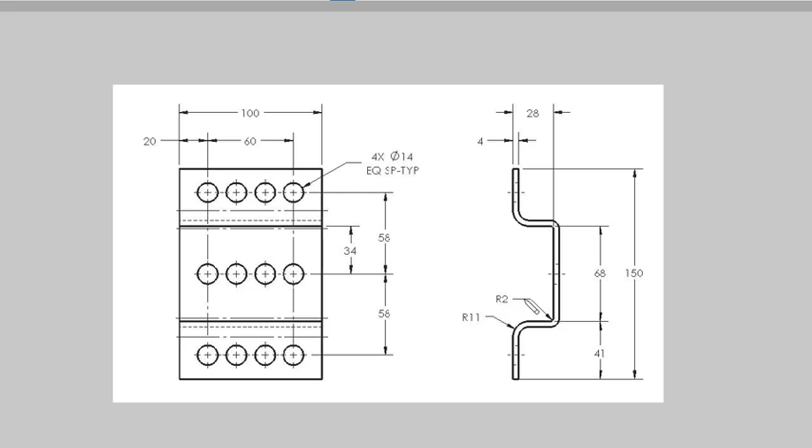But if you try to draw all the details of the profile, it's going to be too tedious. So instead, I want to use an open profile method. And also this part is symmetric, so I'll just draw half of it and mirror it. Make sure the unit is millimeters. I'm going to use the right plane to make a sketch.

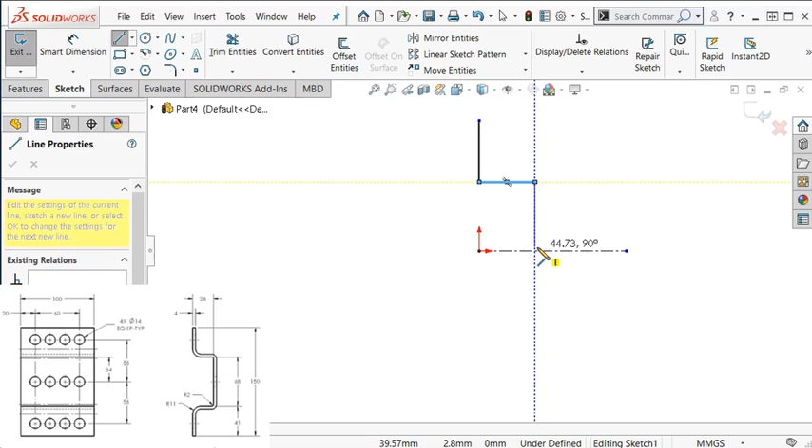I'm going to use a center line because I'm going to draw only half of it, the upper part. And I'm going to draw an open profile, like so. I don't have to make a closed profile because it's a thin part, constant thickness. So let's start adding dimensions. It is a good practice to use the largest dimensions first.

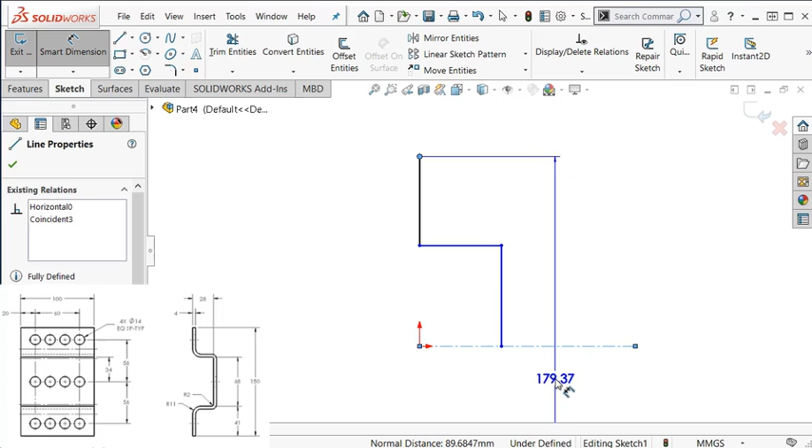So I'm going to add this overall width or height. Select the endpoint, select the center line. Because one of the selections is the center line, I can move my cursor to the other side. It's going to be a symmetric dimension. And that will be 150. And to here is 68.

And this length, enter, escape, and that's going to be 28. So that already fully constrained this. And there are corners, corner fillets. Actually, in thin extrusion, it has an option of adding a corner fillet, but the two radii are different in this case. So you can't do different radii in the extrusion at the same time. So I have to add a sketch fillet in here.

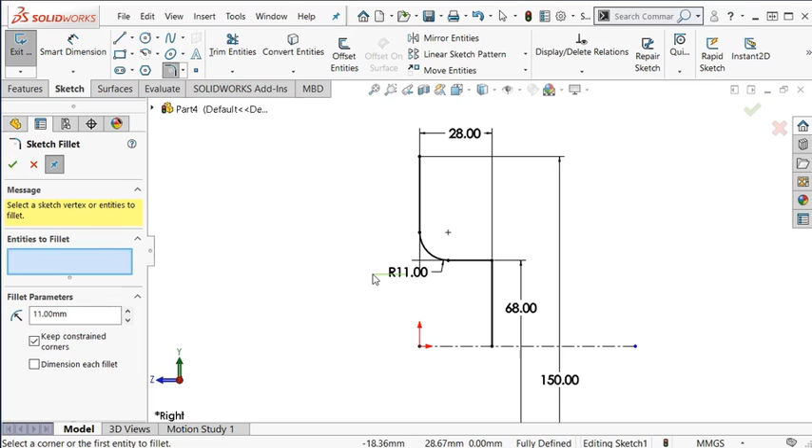The dimension here, this is the internal radius, which is 2, and that is an external radius, 11. And in thin extrusion, the internal radius you can specify. So I'm going to use this corner, add a sketch fillet, and the size will be 11. And just pick the corner, radius 11. Okay, sketch is done, and I can mirror the sketch, mirror about.

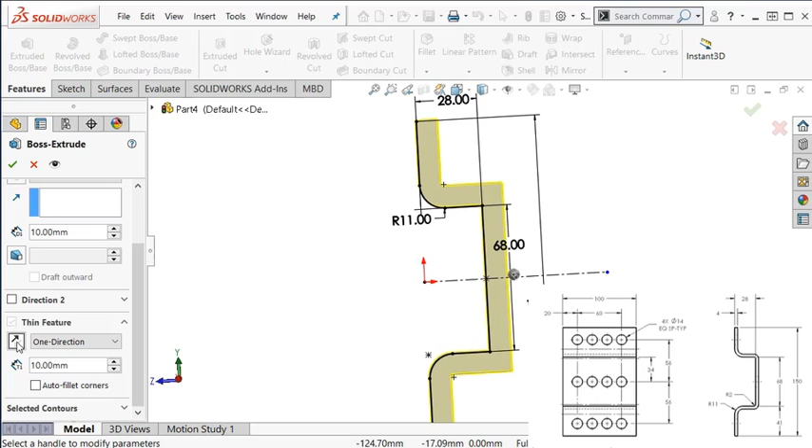That's the center line, and that creates this profile, open profile. I'm going to create an extrude. You want to make sure that it's going in the right direction, so you can flip that thin feature. No, not that one. Sorry, this one, thin feature, because this is an open profile. The thin feature is already selected. So here you can change which direction you want to thicken.

This direction is correct. That's how I drew it. The thickness will be 4. I can also add auto-fillet corners. So these two are the corners, and its radius will be 2. And this radius is the internal radius. So internal radius and outer radius, but here, this radius is an internal radius. I want to extrude it by 100.

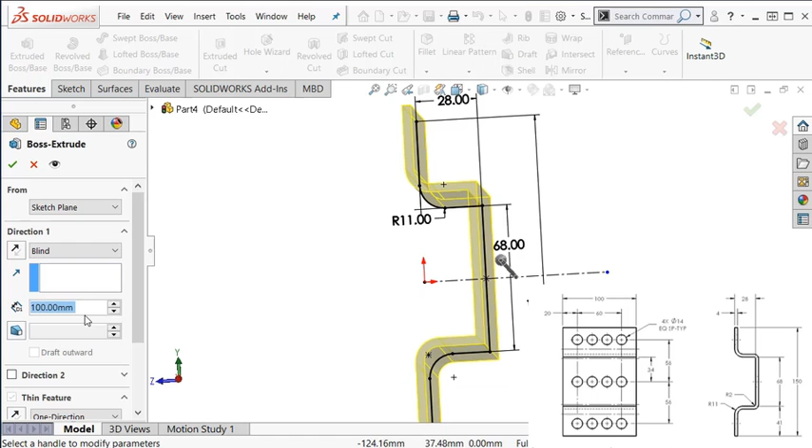Okay, so let's say okay, and I get this part. Pattern tools I'm going to show in a separate video.